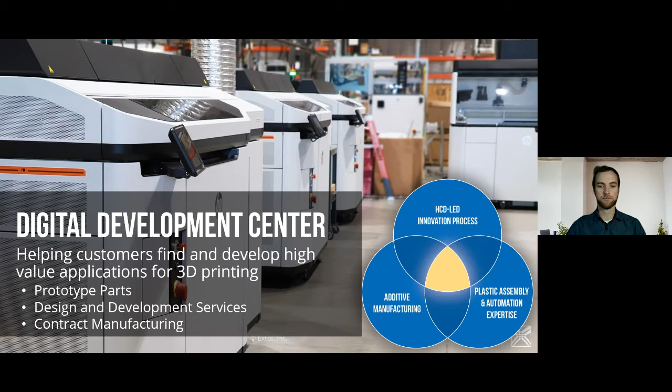So there's a unique value to our customers when we look at why additive and why Extol - it's that combination between our plastic assembly expertise, additive manufacturing, and our innovation process.

We're going to take a quick look at the multi-jet fusion process for those that are unfamiliar with it. It's a relatively new technology that brings new innovation to the additive space, with production as the end game.

It's a powder-based system that utilizes agents to assist in the thermal processing of IR energy, fusing the parts together.

Some key benefits are consistent print times, part density and durability, and thermoplastic parts that can be joined with traditional welding technologies.

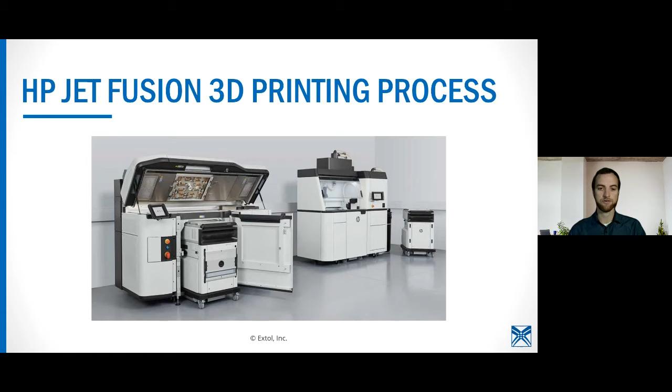The basics of multi-jet fusion: it starts with a layer of powder, 3/1000ths of an inch, spread across the build surface. Then HP leverages their 2D printing technology and applies two different agents - a black fusing agent and a clear detailing agent.

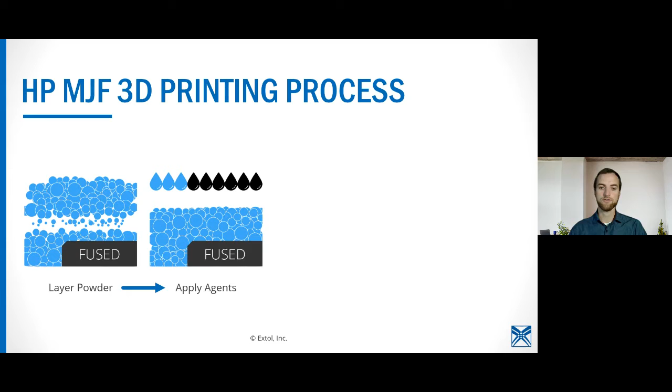The black agent is applied where you want the parts to be grown, and the clear is applied around the edges of those parts.

Then when IR energy is applied, the black fusing agent absorbs that energy and melts the plastic, while the clear agent evaporates, and through evaporative cooling gives you a nice boundary layer between the fused and unfused plastic.

After that, you have a fused part, and the process continues for thousands of layers until you get to your final build height. One thing to note is it's a build envelope, not just a build surface.

So you can nest and position parts throughout that whole three-dimensional box, as seen in the top right-hand corner there.

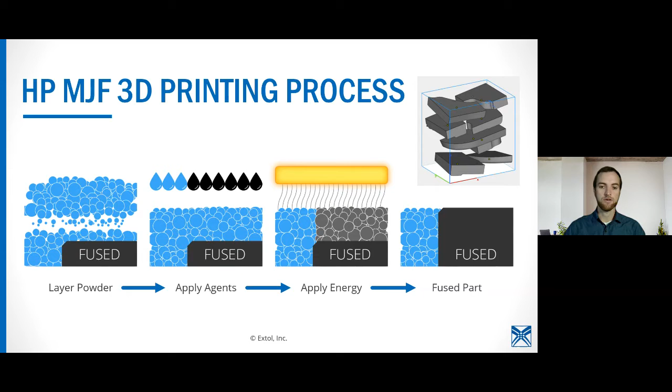Another thing to note is the IR energy penetrates 2 to 3 layers deep, so you're getting really good molecular entanglement and basically mini welds happening between the layers, giving you great X, Y, and Z strength.

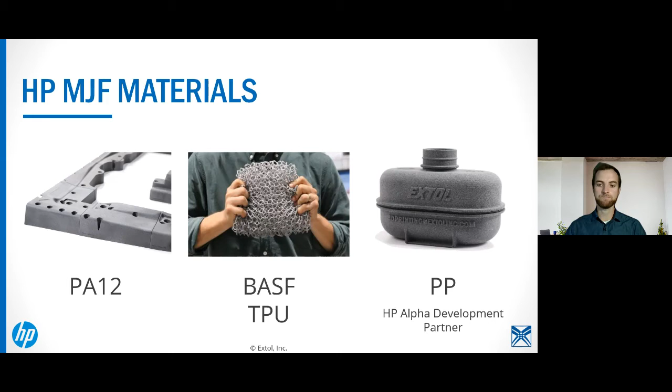Extol currently offers 3 different materials for the multi-jet fusion process: PA12, BASF TPU, and the newly released polypropylene. Extol was the alpha development partner with HP and has been printing this material for the last 8 to 9 months. So when we look at the different materials, there are different key features why you would use those for each individual application.

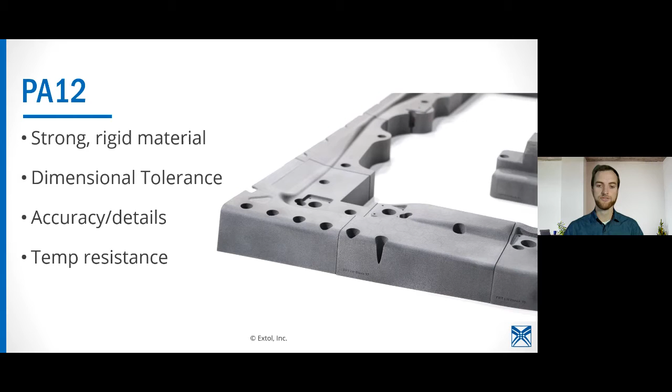PA12 is great for parts that require a strong, rigid material, increased accuracy and tighter tolerancing. With PA12, this is our most dimensionally stable material. It also does very well with fine detail, and it's more temperature resistant than all of our other powders.

BASF's Ultrasint TPU unlocks some new applications with its unique characteristics. It's a flexible, durable material, shock absorbing, soft touch, non-marking. We'll dig into that deeper later in the presentation. And then there's the ability to design controlled stiffness and durometer through latticing.

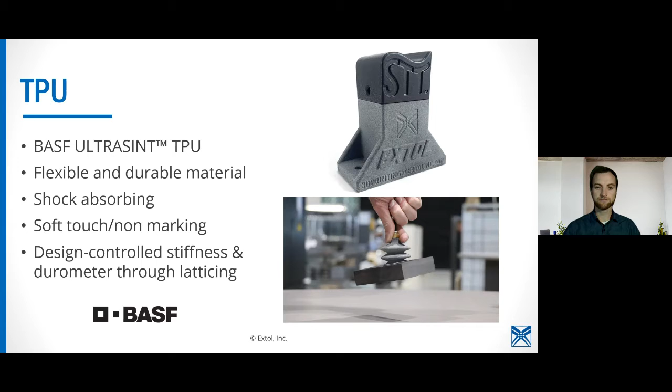Polypropylene is an exciting new material. It's real polypropylene, not like polypropylene-like material as you see in a lot of other technologies. This is tried and true polypropylene. It's lightweight, with ductility, elasticity, and toughness, and great chemical resistance. With polypropylene being one of the most common plastics in the world, there are a lot of opportunities for welding multi-jet fusion polypropylene parts to injection molded materials that are chemically compatible. This brings functional prototyping to the next level.

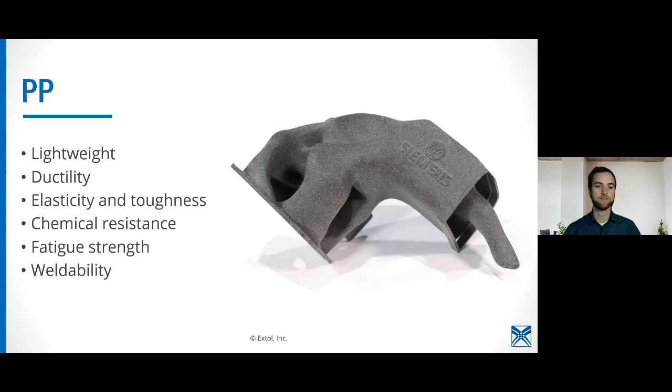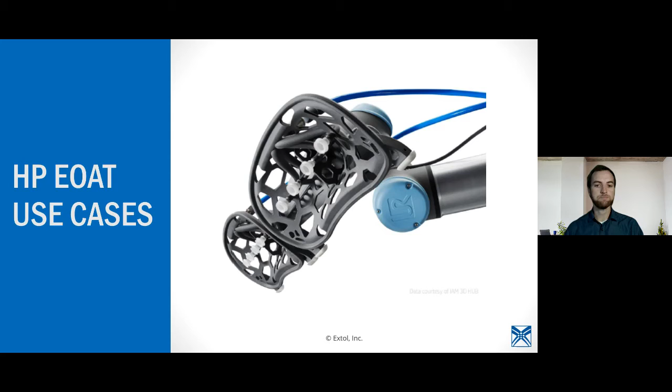So we're going to start by taking a look at a couple of use cases that HP has published before taking a deep dive into the benefits of multi-jet fusion printed end-of-arm tooling.

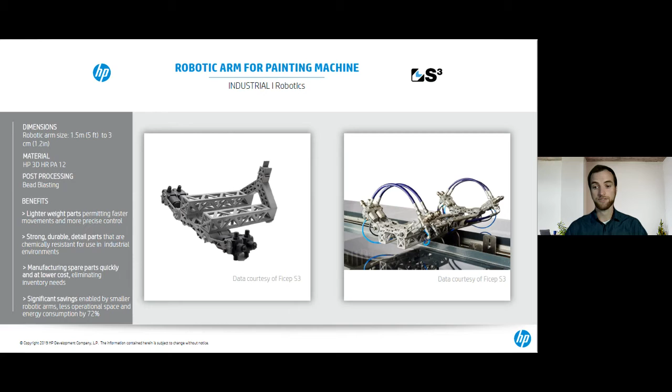The first use case is a machine arm from an industrial paint machine. Multi-jet fusion provided the strength needed to enable this application with 3D printing components where other technologies fell short. They were able to achieve lighter weight, enabling faster movement and more precise control. They produced chemically resistant, strong, durable, and detailed parts. There were also benefits in eliminating inventory needs, and the smaller arm led to significant savings.

The second use case is more of an organic contoured shape with the unique benefit of integrated vacuum lines. There was a huge weight reduction of 87% over CNC machined parts, and the weight savings realized with printed end-of-arm tooling could enable the use of collaborative robots, which seem to be an industry trend in several applications. So, another way to unlock cost savings by reducing weight.

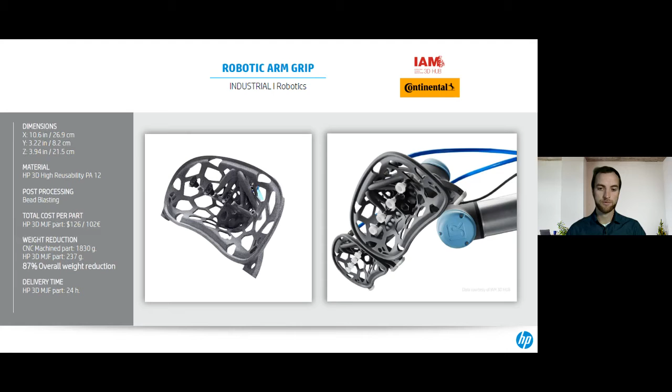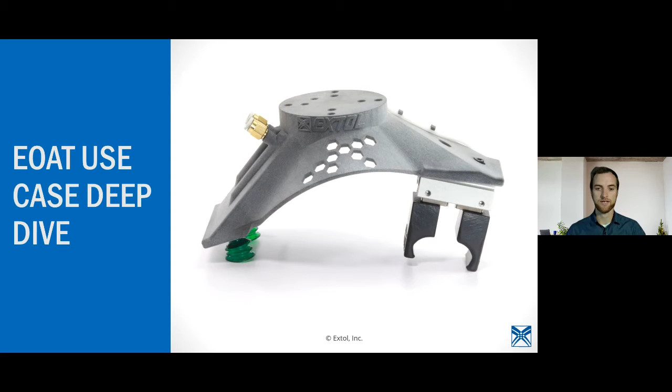Each application is very unique, so we will use this demo end-of-arm tool to highlight the different benefits of multi-jet fusion and look at some design tips. So let's take a closer look at the end-of-arm tool in action.

You'll notice when I start the video, there are 2 different methods of picking up the handles in the printed nest there. There are gripper fingers on the right and then vacuum cups on the left.

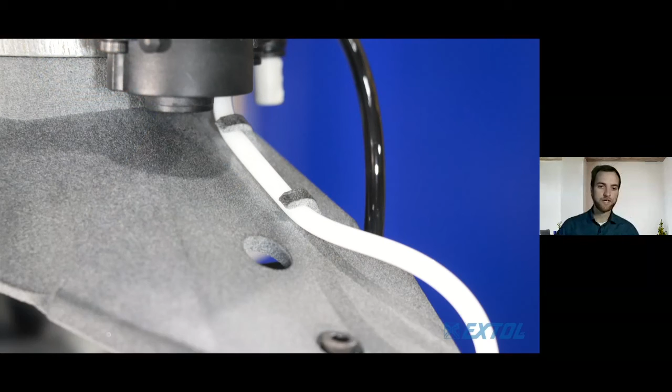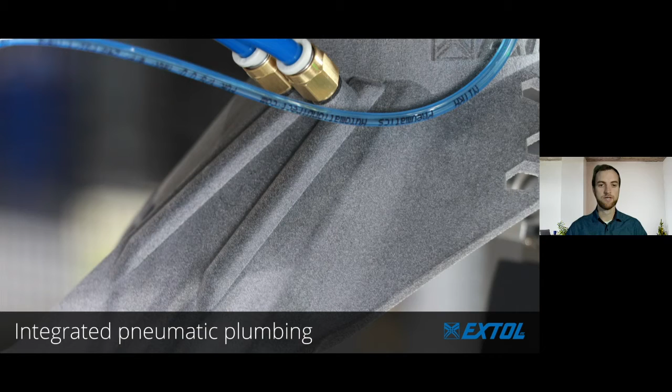So when we look at the different subsystems, I just want to highlight a couple: integrated clips for pneumatic tubing, soft touch grippers (this is the TPU material we'll look at), integrated vacuum plumbing, meaning lines printed into the part, and then lightweighting capabilities there. And the robot doing a nice little dance for us.

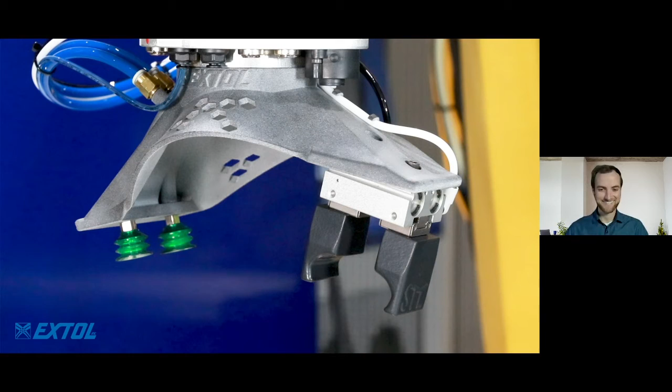So there are 3 different subsystems I want to take a closer look at. Let's start with structure. The structure of your end-of-arm tool is where the weight savings and design freedom begins. The combination of plastic being lighter than aluminum and the flexibility of putting material only where necessary can unlock huge benefits. When we look at mounting, limitless mounting options—any angle, any compound angle—become easy when you're starting from scratch with a 3D printed component that allows much more design freedom.

When you look at the different materials—I'm going to come back to generative design—but when we look at the different materials, PA12 gives you strong and rigid, but if you really needed a lighter weight, polypropylene might be an option for specific structures. Generative design can drive down weight in higher end applications.

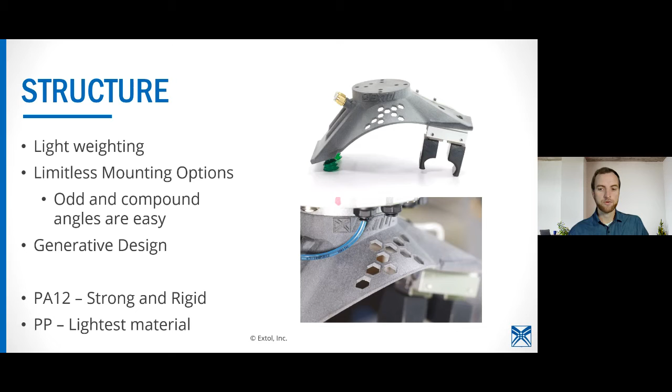So let's take a look at what generative design entails. It's an exciting tool for getting the best optimized shape and use of material to reduce weight while providing necessary structure. So when you look at this example from left to right, it's showing the journey from traditional subtractive manufacturing design to a topology optimized or generative designed design.

When you look at all of the different steps along the way, not all applications require you to go direct to a topology optimized design. You might be okay just with a lighter weight design and not have to invest in the higher end optimization software needed for topology optimization. So when you're going through the process of designing your part, you can stop at any one of these designs wherever you get to the point where you meet your requirements.

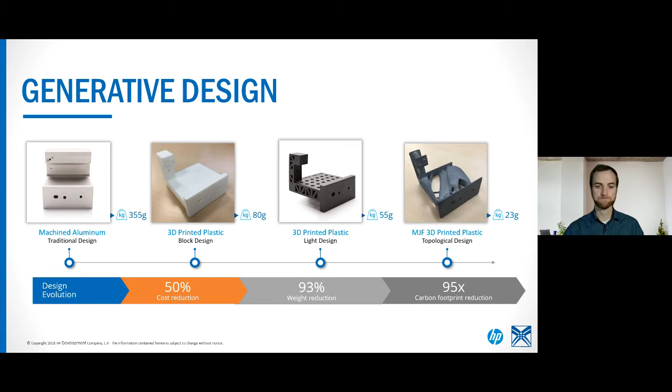The second subsystem we can look at is pneumatics. With multi-jet fusion, pneumatics can become cleaner and easier to assemble. So let's take a look at integrated airlines. In this case, it's individual lines, but there's the ability to have multiple branches coming to a common fitting, reducing the amount of connections and pneumatic lines that you're running.

When we look at these fittings, they were threaded into the PA12 after they were tapped after printing. But for larger fittings, you might be able to print in the threads or insert a brass threaded insert if required. And then thought-out routing with integrated clips can also speed assembly and make your end-of-arm tool look cleaner and be a tighter package.

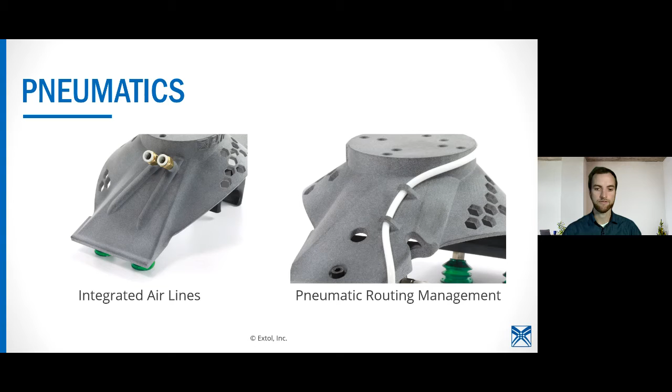Also along the pneumatics frame, it would be from my machine design background, it always seemed like there'd be a part that required vacuum in a certain location, but due to geometry, you had to settle for a subpar off-the-shelf solution. With TPU and MJF, custom vacuum cups are now a possibility. And then back to design freedom, you're able to place and orient vacuum in the right orientation without messing with several off-the-shelf brackets and configurations to get the desired compound angle that you need.

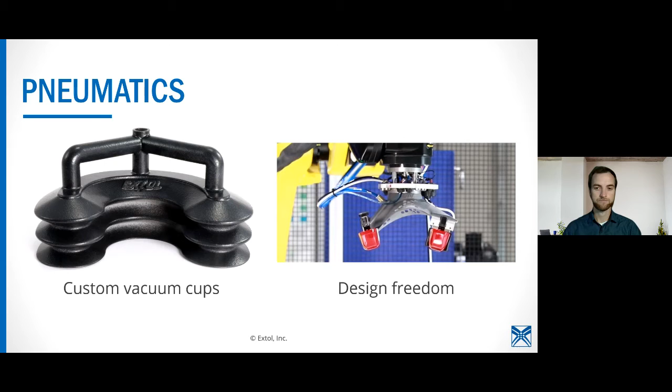The third subsystem is part handling. So the common adage of complexity is free with additive is true with custom grippers. The savings over CNC increases with the added complexity that would require multiple setups or even allow features that are not traditionally manufacturable. Vapor smoothing and the BASF TPU provide an excellent soft touch solution and can be combined with PA12 for applications requiring increased rigidity.

So you can see there's two different train of thought here. For the top portion, it's all TPU, and for the bottom portion, for a higher requirement application, there was TPU for the soft touch and PA12 for the rigidity. And custom grippers can lead to allowing faster robot movement by securing your part more securely.

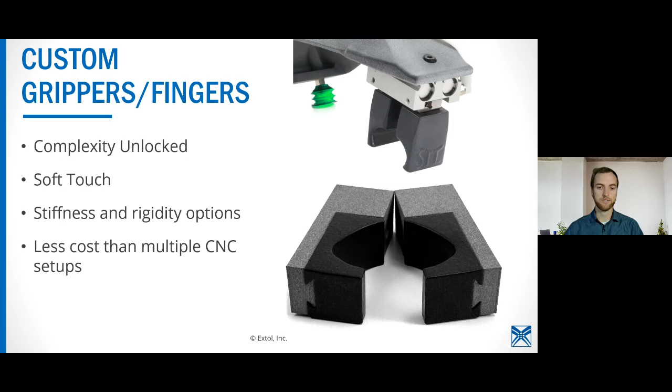The vapor smoothing solution that Extol leverages is from Additive Manufacturing Technologies. The AMT chemical smoothing process takes soft touch tooling functionality to the next level. It smooths the surface to reduce marking, seals the TPU outer surface, and makes grippers easier to clean to avoid dust and contamination from scratching your parts.

So you can see an unfinished TPU sample on the top left there, and after vapor smoothing, you get a really nice smooth surface. And when I talk about sealing the outer surface, you can see the water droplets on the lower bellow part.

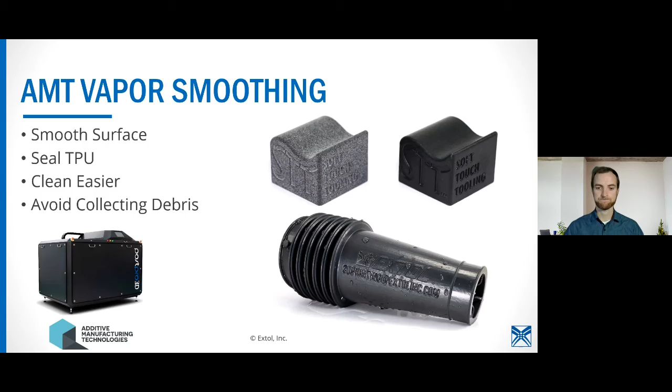So the key benefits of multi-jet fusion, I think, can be summed up into three categories. There may be more, but we're going to touch on these three. Design freedom, so we talked about the endless options for mounting angles and those sorts of things. Speed of optimization, iterations, ability to get your end of arm tool to production faster. And then weight savings is a large driver in lowering the cost of your overall system.

So let's take a little closer look at lowering cost. Besides being able to produce the actual tool cheaper, you can look at robot costs. When you take weight out, could you go to the next payload down as far as robot to save cost and overall the robot price?

Cycle time can be decreased potentially with more precise, faster movements, as well as decreasing the weight on your tool could allow you to have more action, such as cylinders attached, that would reduce robot movement and reduce cycle time in that manner as well. And then speed and accuracy of the robot movements could also lead to cycle time and cost savings.

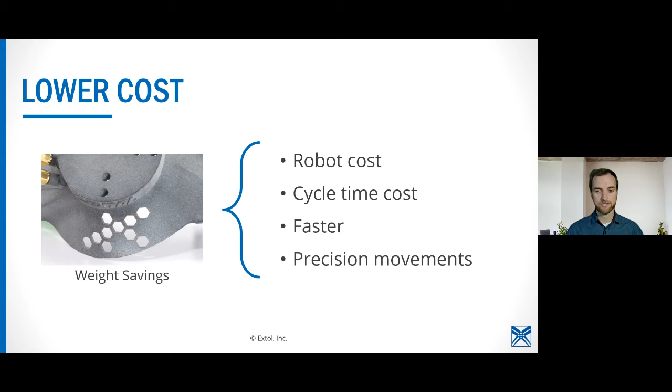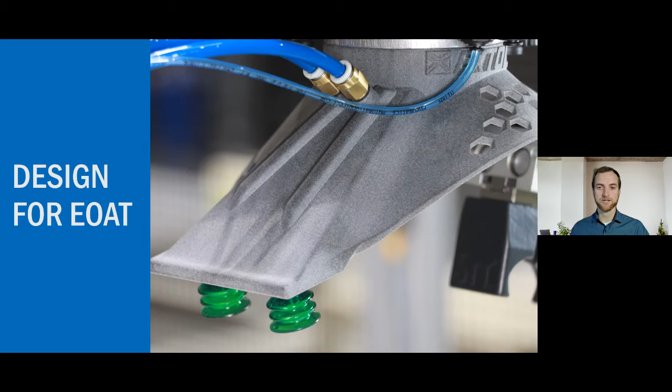So that's all great. You may be saying, what do I need to consider when designing end-of-arm tooling with multi-jet fusion? So let's take a look at a couple different things to consider.

When we look at part size, I mentioned that the build envelope is a three-dimensional space, and you can see the dimensions there. So when you are looking at your end-of-arm tooling design, we want to limit material to lower cost and weight. The more parts you can fit into this build envelope, the more cost-effective your end-of-arm is going to be. As well as optimizing your build volume.

So if you can nest parts together or create such a design that nests together quite well, you can increase the amount of parts that you can fit into this build envelope. And if your end of arm is too big for this to be built as one in this build envelope, splitting parts is always an option.

There might be attachment joining methods that you can put those parts together. Could be a through bolt with a nut, brass heat inserts, dovetail joints. Those are all things that we would be able to take a closer look with you on an application by application basis.

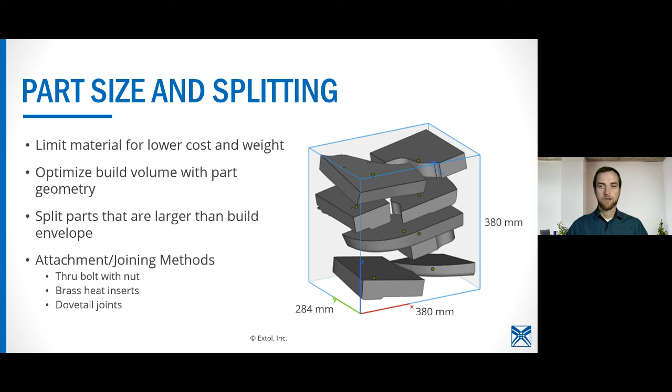You might want to design a poka-yoke for easy assembly. And then, as we mentioned earlier, take into consideration supported versus unsupported TPU. That's definitely design dependent, whether you need that added rigidity of the PA12 backer.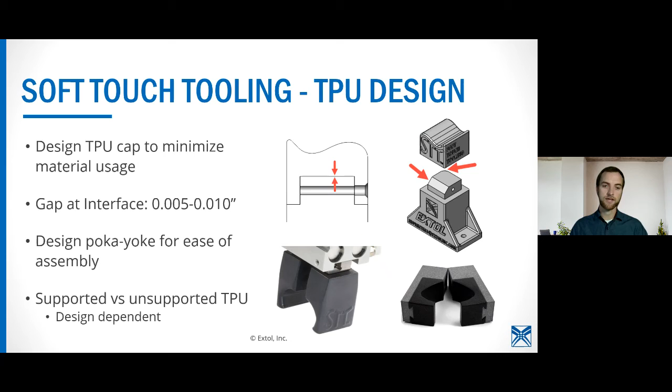Combining the PA12 and TPU can be done with dovetail joints like you're seeing on the right there, fasteners, custom designed printed clip features. Those are all ideas and things that we can work through on your design.

When considering vapor smoothing with the TPU, it is important to have a feature present to hang the parts from, as the vapor smoothing process requires parts to be suspended. So in the example on the left here, there's a flathead screw hole to combine these two pieces together, and we were able to hang that TPU cap from that hole. So some sort of feature. It could be sacrificial. You could just design a little loop that the parts can be hanged from, and you could clip that off after the vapor smoothing process.

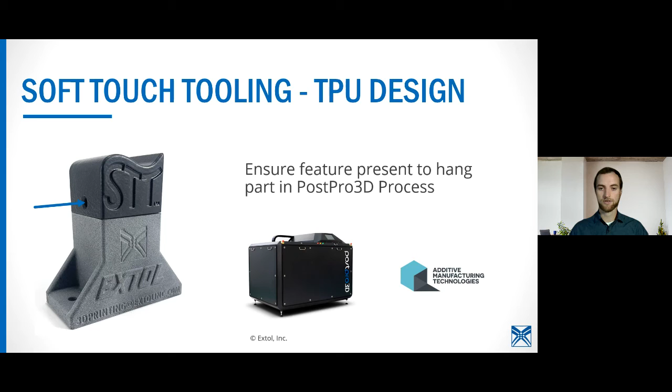Integrated pneumatics. With multi-jet fusion being a powder-based process, ease of powder removal is important to consider in the design phase. For long, complex internal channels, it can be helpful to model a pull chain in CAD that is printed with the part, then pulled out during post-processing to loosen up the powder in these channels. So you can see that blue highlighted pull chain or ripcord is an actual cord that's printed with the part, and then we pull that out at the end, and that breaks up some of the powder, letting the glass bead blast media do a better job and get in there more efficiently.

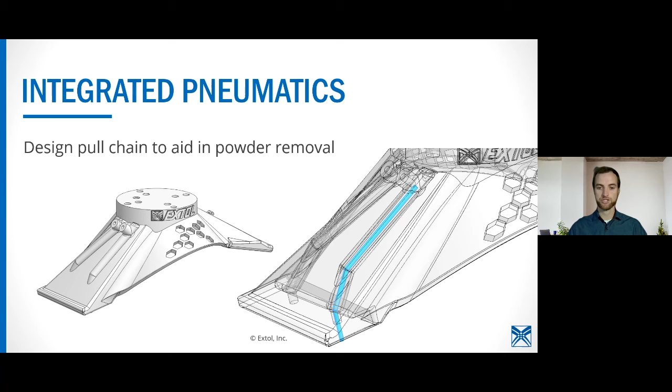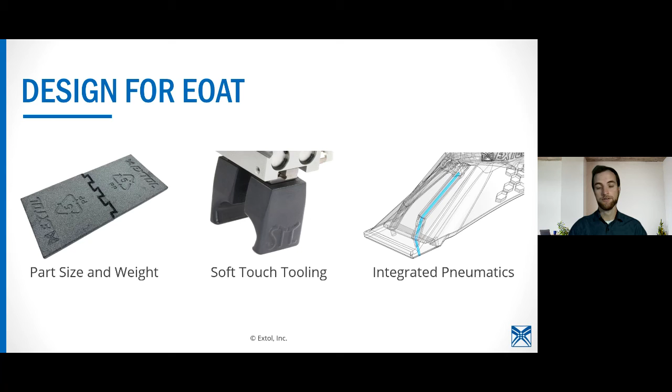So to review, there are three main areas to consider when designing end-of-arm tooling: part size and weight for cost efficiencies, soft touch tooling for non-marking of your parts, and then integrated pneumatics to clean up and reduce weight with your end-of-arm tooling design.